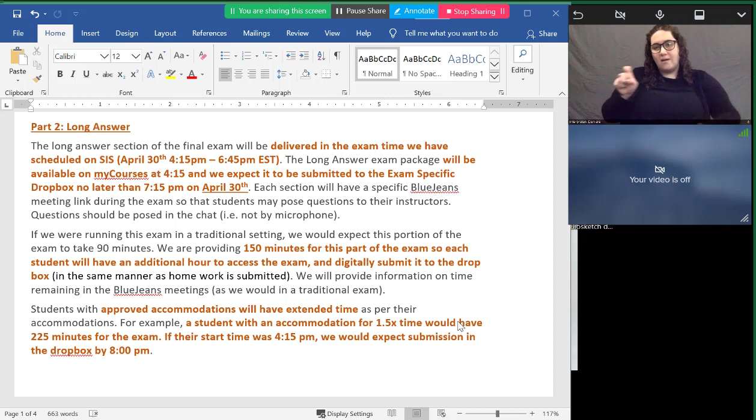So I think the last part of this, which we end up talking about a lot in things like faculty meetings, I think that there's a subset of people who are very worried about the academic integrity of these online exams. I was going to say we're going to treat you like adults, but I think we're going to treat you like engineers, in that we're going to expect that you approach this task with integrity.

So I think everyone knows what cheating looks like, and I guess I have faith in you that you'll approach this task honestly. Does anybody have any questions about the exams before we move on to the lecture material for today?

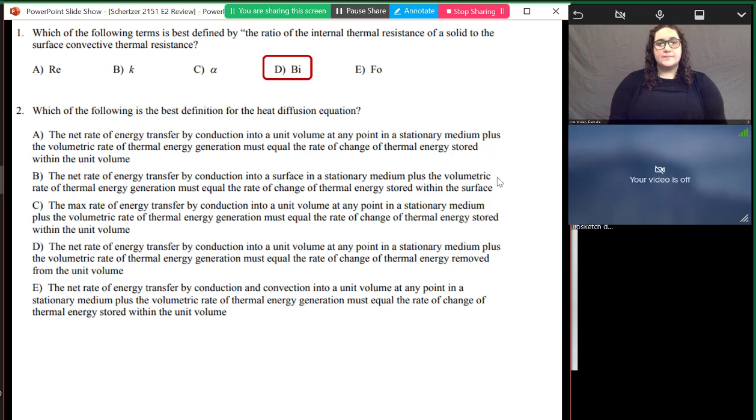Question 2: which of the following statements is the best definition for the heat diffusion equation? I won't read all of these, but I've underlined the key parts. First I wrote the heat diffusion equation down—this is on your exam equation sheet, so you'll be able to find it there. If you haven't looked at that sheet yet, I really encourage you to do your studying for the exam using that sheet. As I said, I did our exam yesterday, and because I haven't used that sheet all that often, I found myself spending time hunting for equations on there. If I was more familiar with that sheet, my experience would have gone even a little bit faster.

So here I'm trying to physically understand what this equation means. I'm not going to read all these to you, but I'll underline what I think are the important differences in these answers. Part B talks about thermal energy storage in the surface. One of the things we know about heat transfer is if we have a control surface, we can't store any energy in there because there's no mass. So we know that energy storage term isn't talking about what's going on in a surface—it's got to be talking about what's going on in a volume, so that there's mass inside of it.

Part C looks mostly good, but it talks about the maximum rate of energy transfer by conduction. This equation doesn't tell us anything about minimums or maximums. We're not taking a derivative here to do some kind of optimization analysis. So this part is incorrect in C. It's not the max rate of energy transfer by conduction.

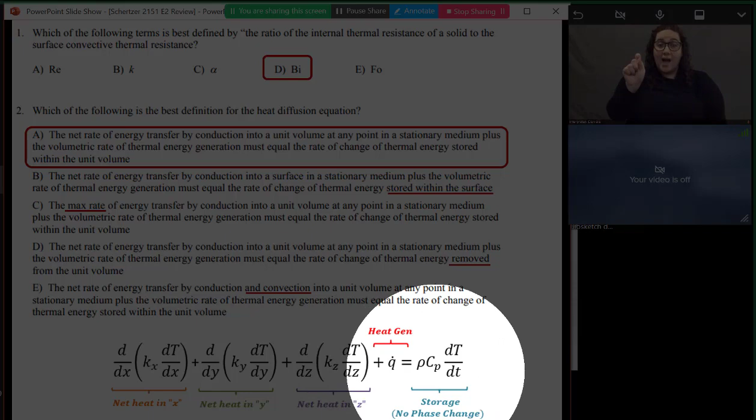So it's not E. By process of elimination, we're left with A: the net rate of energy transfer by conduction into a volume at any point in a stationary medium, plus the volumetric rate of thermal energy generation, must be equal to the rate of change of thermal energy stored within the unit volume. So these first three terms are talking about conduction in any of our three principal directions. Q triple prime, or Q dot, is energy generation per unit volume. And this term here is talking about energy stored within our volume.

Question 3 asks us which of the following is not an assumption made when using the semi-infinite model. So the initial temperature is uniform. We need to assume that the temperature in our material, or our steak for example if we're searing it, starts at some uniform temperature, and that the properties are constant. We can't really do any of these analyses if the properties are variable.

The Fourier number is greater than 0.2. Remember that the Fourier number is a dimensionless time. In this semi-infinite model, like when we're searing our steak, we only want it to happen really quick, so it happens at low times. 0.2 is the cutoff for the Fourier number, but when we want a semi-infinite analysis, we want the Fourier number to be lower than 0.2. Hopefully we remember this from our case study. So C does not look that good.

And D says heat has not propagated deeply into the material. That's true, so we can't apply a symmetry condition at the center of our material, or some sort of insulated boundary condition, because the penetration depth hasn't reached that symmetry line yet. So it's not really the right boundary condition to apply. The answer, which is not an assumption that we make, is that the Fourier number is greater than 0.2. Because for this type of analysis, we need the Fourier number to be lower than 0.2.

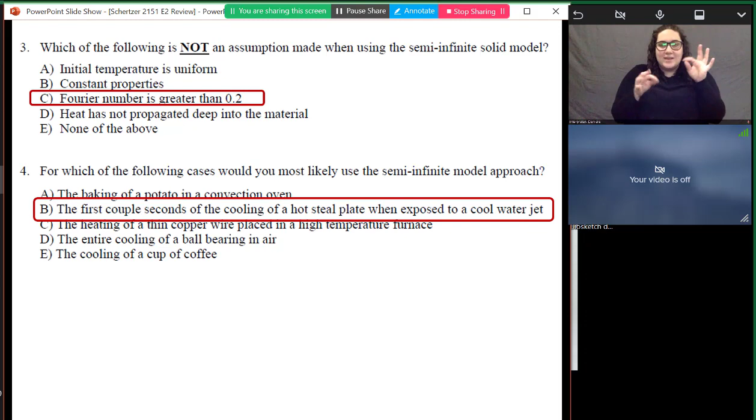So now we're asked to consider a pipe where the length is much larger than the radius. When you see this idea that the material we're interested in is much larger in one direction than another, that's telling us it's 1D conduction in the small dimension. So here, the length is much bigger than r squared, right? Basically, we're not worried about the edge effects. That's shown here on the right.

We're given an initial temperature, and it's suddenly exposed to a cold fluid on the outside and a hot fluid on the inside. Assuming constant and isothermal properties, what is the simplified version of the heat diffusion equation?

So here, from the notes, although in the exam, you'll look on your exam sheet and you'll look for the heat diffusion equation for cylindrical coordinates, right?

Now, when L is much bigger than r, actually, I think the first thing that I do - so here you might not see it - we're saying that the properties are isothermal and uniform, or constant, right? So they're not changing. So I can take the K's out of all of these terms. I have the same K in all my directions, and it's not changing with temperature, so I can pull it out of my differential terms and divide the whole equation by K. So that's what I did with this first simplification.

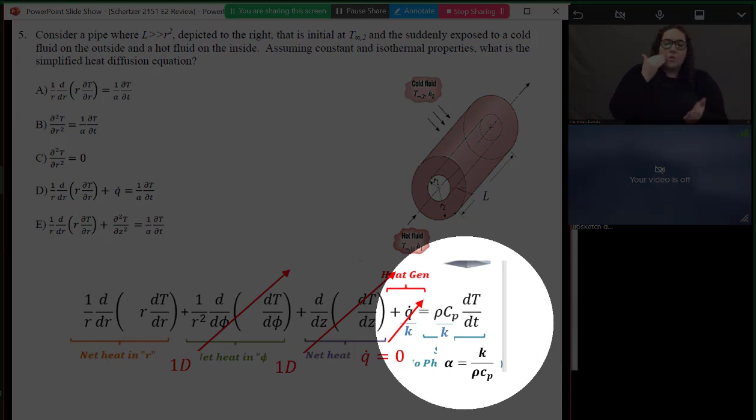The second thing is that we have 1D conduction, so we're only worried about conduction in the radial direction. There's no heat generation - it doesn't talk about generating heat anywhere in my problem, so I've eliminated that. And then I recognize the definition of alpha is K over rho Cp, so this constant in front of my transient term is 1 over alpha.

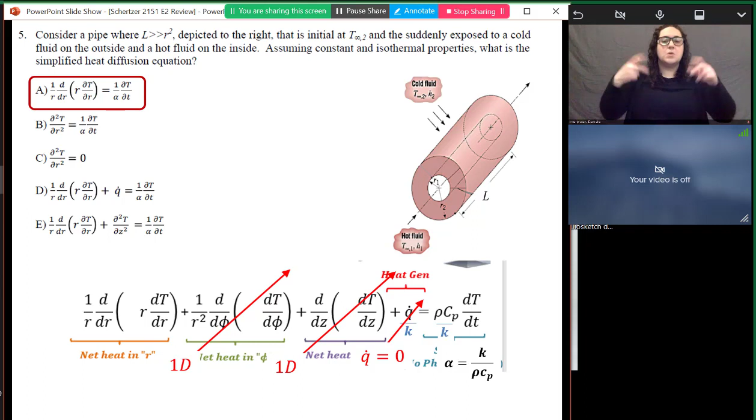So when I do all this simplification, I realize that A is the same as this simplified equation that I have here.

We're still talking about the same case. It says, which of the following is the best pair of boundary conditions? When you see this kind of equation, I always really force myself - this is one of those spidey sense kind of things - to slow down when it's asking me about these boundary conditions, because it's really, really easy to mess up the signs here.

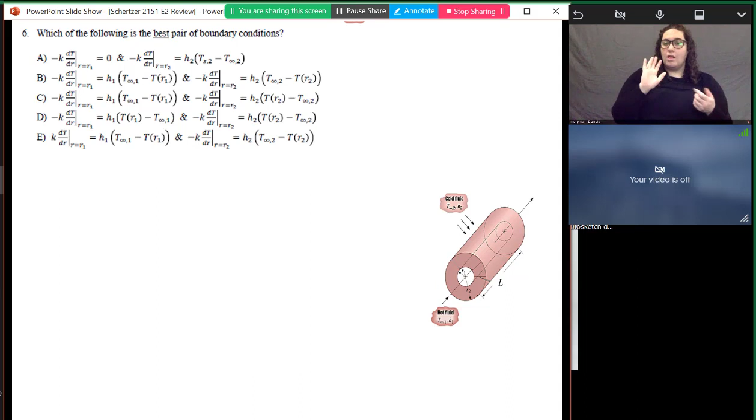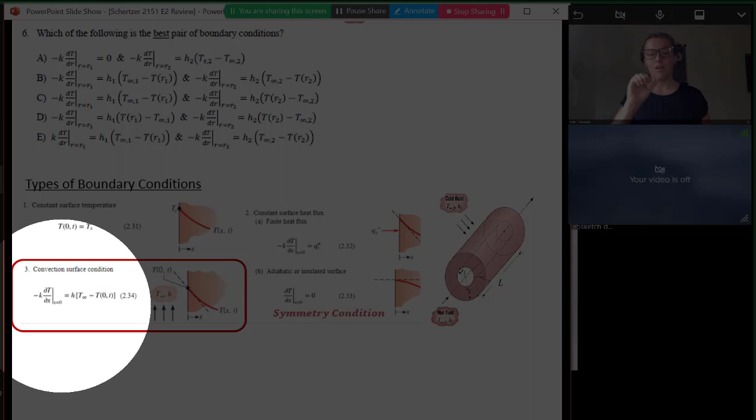So I know signs are going to be important. First I think about, okay, what do my different boundary conditions look like? In this case, I have a hot fluid running through the center of my pipe and a cold fluid coming cross flow over the side of my pipe. So I have convection on the inside and the outside boundaries. My convection conditions look like this, where on the left-hand side, I'm equating the conduction - this is actually for a wall and not for a cylinder, but it looks similar.

So here, I have conduction on the left-hand side being equal to convection on the right-hand side. So I know right away that it can't be A, because A has at R1, it says that there is no heat transfer there, and that's just not the case. We know that heat is coming in at that inside boundary, so A is incorrect.

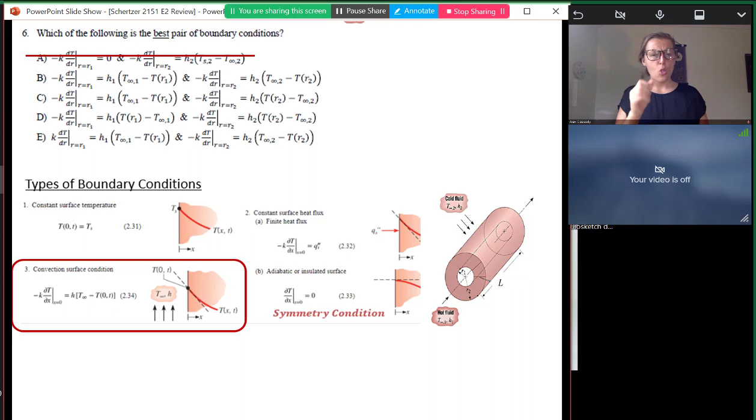On its face, as I'm looking at them, all of the rest of these boundary conditions look okay - they're all convection boundary conditions. So I've got to go through them and find out what's going on here.

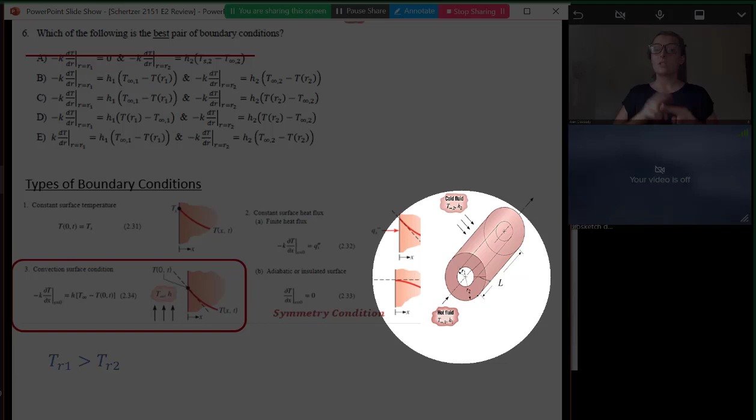So when I do this, I try to remember, okay, where's the hot temperature and where's the cold temperature? In this case, the hot temperature is at the inside and the cold temperature is on the outside. So as R increases here - as I move from the center of my pipe out, or the inside wall of my pipe out to the outside wall - I'm cooling down.

So that means that as R is increasing, T is decreasing, so my derivative, dt by dr, must be negative - it's less than 0. This is true at the inside wall, and it's true at the outside wall because there's no other source of heat in this problem. So both of these derivatives, dt by dr, at the inside wall and the outside wall, both need to be negative.

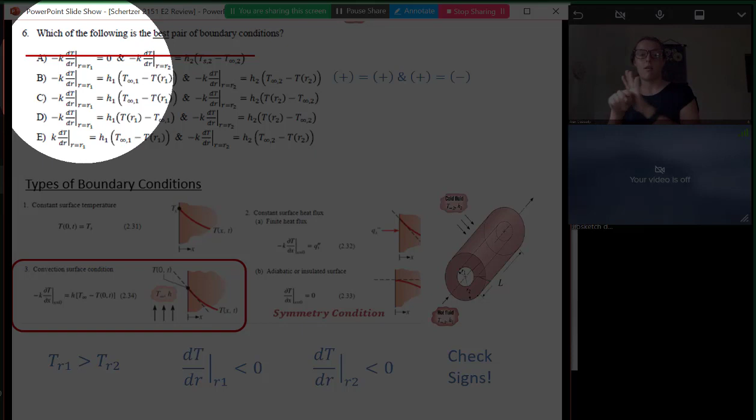So now I'm going to go through options B to E and look at the signs and make sure that the sign on the left-hand side of all these boundary conditions equals the sign on the right-hand side. So in the first one, I know that dt by dr is negative, and it's multiplied by a negative, so I have a positive sign on the left-hand side of my equation. And now T infinity 1 minus T at R1 - T infinity 1 is bigger, it's hotter in the hot fluid than at the surface because there's some resistance there.

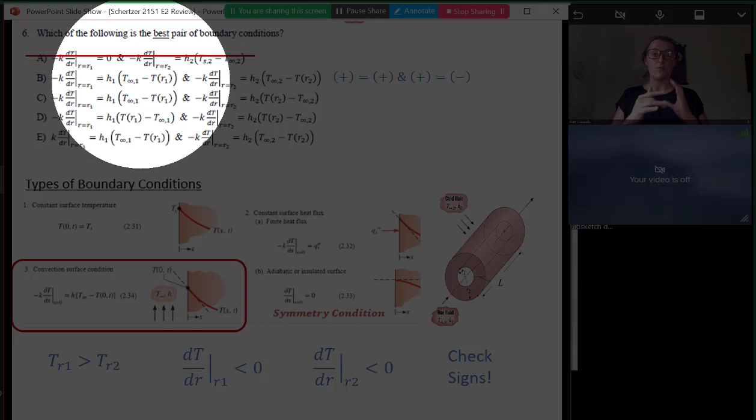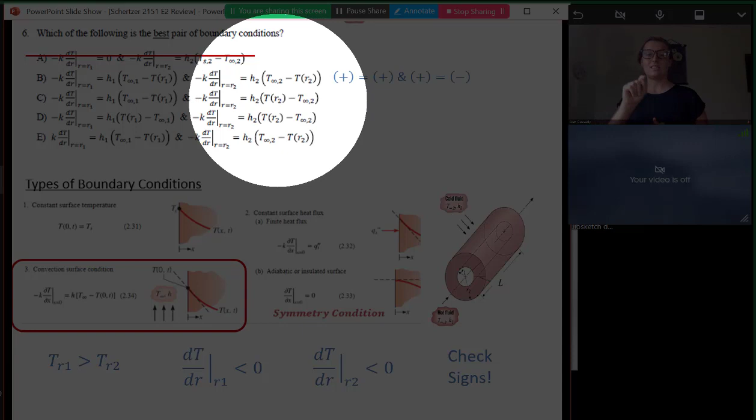So this is positive too, right? This delta T is positive. So this B, the first part of B looks good, right? It's positive and positive. But the second part of B, it's positive still on the left-hand side, but it's saying T infinity 2 minus TR2. I know as my radius is increasing, my temperature is decreasing, but the outside surface of the pipe is still hotter than T infinity 2 - that's the cold fluid being used to cool this pipe down. So T infinity 2 is lower than TR2, so that's a negative sign on the right-hand side of my second boundary condition. So it can't be this one.

I do the same thing. The first boundary condition is the same, so it's positive equals positive. And the second boundary condition flips my delta T around, so it's now positive equals a positive. So if you were going quickly, you might just stop at C. But sometimes I don't trust myself, so I'm going to look through the rest of them as well.

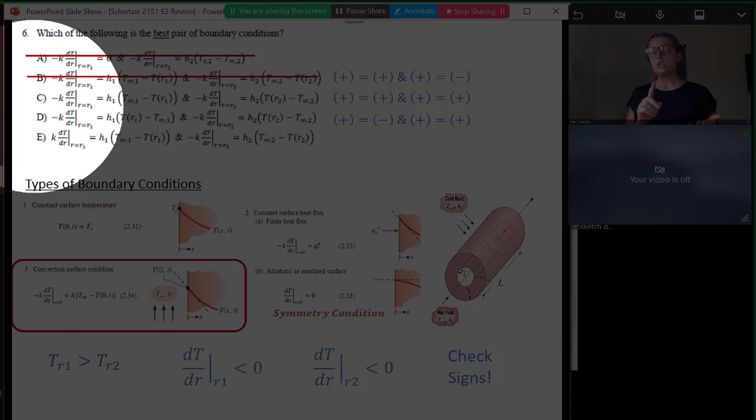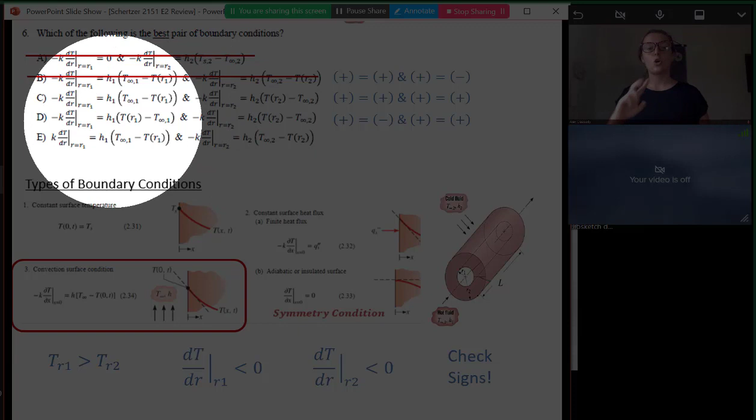So here, again, I have a negative times this derivative, so it's positive - negative times negative. But now this, TR1 minus T infinity 1, this temperature is colder than that one, so this H times delta T here is negative. So a positive can't equal a negative. So this one, D, I can eliminate.

And E, right? So here, there's not this negative K. So this is negative on the left-hand side of my first boundary condition, but positive on the right-hand side. So I know that this one is also incorrect.

So I've gone through all my signs here. I slowed down and took the time and picked the one where all the signs were correct. I think this is what you need to do for these kinds of equations, because if I just look at them quickly, it's really easy to think B through E are all almost the same. So we've got to check the signs. Anytime we're applying a boundary condition, make sure your signs are correct. It's not just a matter of saying, oh, it's H times delta T, but what does that delta T have to be to make the sign equal to negative K times the first derivative of temperature with position?

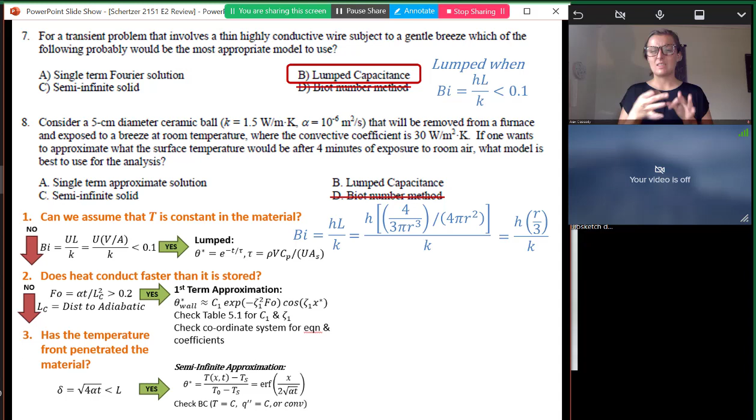I know that L is volume divided by area, as shown here. I simplified it already. This should be 4/3 pi r cubed, with pi r cubed in the numerator. The answer is right though, so then we get h r over 3 divided by k.

So I can put that in, work it out, and see the Biot number is 0.17. It's only lumped if the Biot number is less than 0.1, so this is not a lumped capacitance analysis.

So now I have to go to the next piece on my flowchart: does heat conduct faster than it's stored? I have to check the Fourier number, which is alpha T divided by Lc squared.

For this sphere, or ball, Lc is always the length from the surface to the place where I've applied either a symmetry condition or an insulated condition. For a sphere or cylinder, that's the center. For a symmetric wall, it would be the half width. So here, Lc is R.

So I have enough information to calculate the Fourier number, and I see it's pretty big, much bigger than 0.2, which is my cutoff. So here it is a first term, or single term, approximate solution.

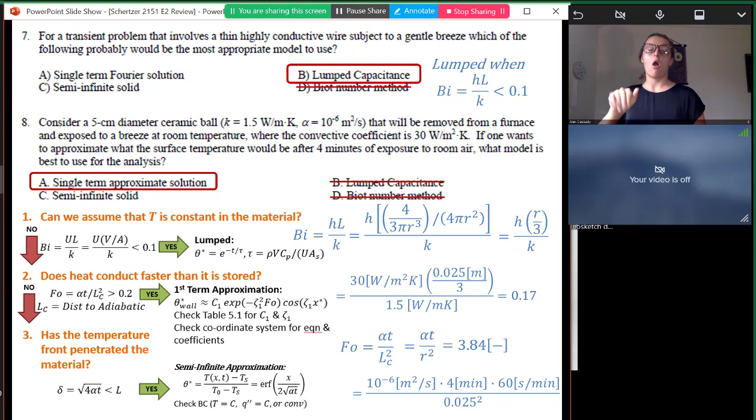So I got an answer for question 8.

Question 9 says: consider a 20 centimeter diameter titanium sphere, initially at 600 degrees Kelvin presumably everywhere. We're given some properties. It's being cooled on all sides by water at a particular temperature with some properties, where the convective coefficient is given. How long does it take for the center of the sphere to cool down to 350 degrees Kelvin when the Fourier number is 0.53?

When I was setting up these notes, I thought this would be a lot of work because I'd have to go through the whole first term approximate solution. It has to be first term approximation if it's not lumped anyway, because the center has changed temperature quite a lot, from 600 degrees to 350. So it knows it's being cooled at the center, meaning it's first term approximation, or at least not semi-infinite.

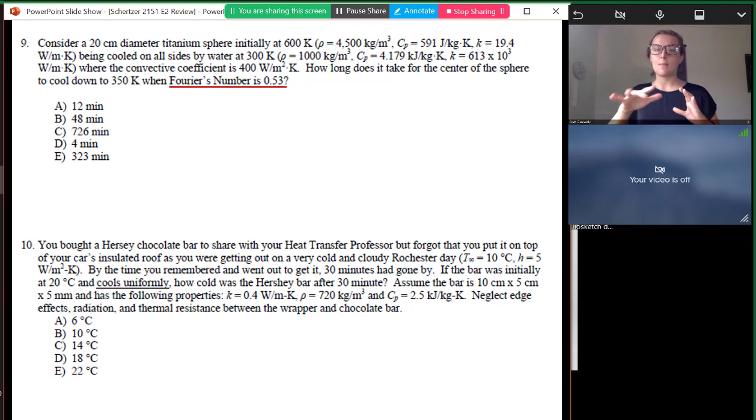But then I realized the Fourier number is 0.53, and it's only asking me for the time. So if I know the Fourier number and the properties, I can just calculate the time without doing any other analysis, just using the definition of the Fourier number. The problem is a little tricky though, giving a lot of red herring information to test whether you know you need to use the properties inside the material.

So alpha is equal to K over rho Cp. I calculated this using the properties of my titanium sphere and got a value, so now I know alpha. R is given, and so is the Fourier number, so I can put this in and get 727 seconds, which is not on the list.

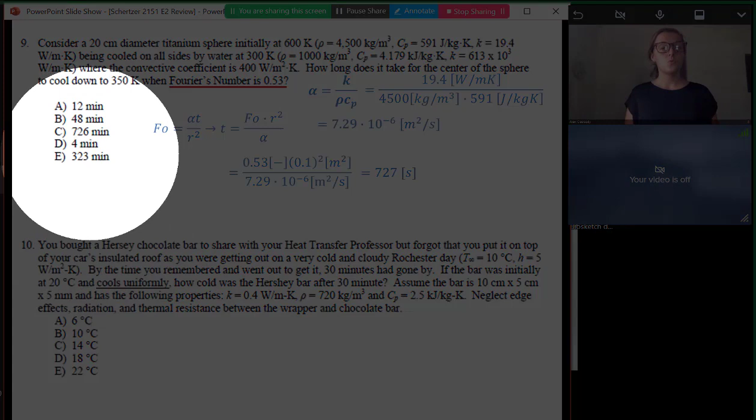If I wasn't worried about my units, and was being quick, I might pick 726 minutes, which is very different from 727 seconds. So I have to realize my units are in seconds, while all the answer choices are in minutes. Dividing by 60, I see the answer should be A, 12 minutes.

So we move on to the last multiple choice question. You bought a Hershey's chocolate bar to share with your heat transfer professor, which was very kind of you, but you forgot that you put it on top of your car's insulated roof as you were getting out on a very cold and cloudy Rochester day. By the time you remembered and went out to get it, 30 minutes had gone by. If the bar was initially at 20 degrees Celsius and cools uniformly, how cold was the Hershey bar after 30 minutes? Assume the bar has given dimensions and the following properties, and we're going to neglect edge effects, radiation, and thermal resistance between the wrapper and the chocolate bar.

So here, I'm going to say that it's lumped. I could calculate the Biot number, but it tells me that it cools uniformly, so that means I can do a lumped analysis. The nice thing about these analyses, first term approximation is the same, is that we don't have to go through all the work of deriving an equation because we're kind of standing on the shoulders of giants. People have done this already, so we know what the answer looks like.

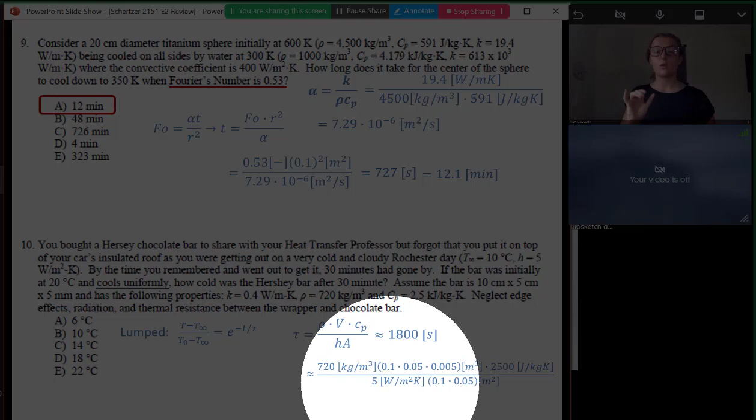But I don't know tau yet. I look on my equation sheet and find the definition for tau, which is my time constant. I know these values, so I plug them in, and I see my time constant - again, I really got to be careful of my units here. It's tricky because if I just look at the units in this equation, it doesn't look like I have seconds here, except that watts is joules over seconds. So the joules in here is going to cancel out with the joules over here, and in the denominator, I'm going to be left with 1 over seconds. So then when I multiply that back up, I get 1800 seconds. So I got to always watch my units.

In this case, it's 1800 seconds that have gone by, so my exponent in my exponential term is -1. Now, one of the things I always do if I mess up these kind of problems is I forget that this exponent is supposed to be negative. So really make sure you check those signs, because I end up a lot of times calculating these things individually and I forget to put the sign back in. So it's one of the things with exams - usually if I messed up on an exam, at least often, it was little clerical things like that.

And then I'd get my test back. I mean, you never got exams back, but when I got my test back, I'd be like, oh, what a stupid mistake to make. Only human, I guess, right?

So here we know T infinity, we know theta naught, that's my initial temperature difference, and I know e to the -1. So I work this out and I get 13.7 degrees. So the best answer here is 14 degrees Celsius.

So that's it for the multiple choice questions. Does anybody have questions about these multiple choice problems we went through?

Okay, we will move on to the first long answer problem, again written by Dr. Schertzer. You can tell because it's a Star Wars question.

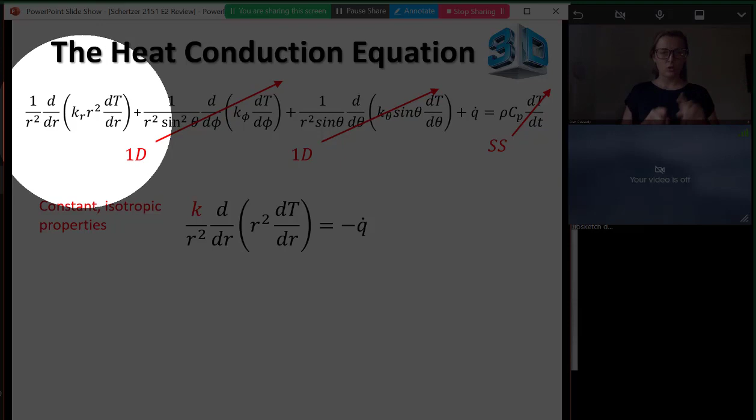We're going to say that this is at steady state, so the energy storage term drops out. We're also going to say that K is constant, so I took K out of the derivative term and moved it over here. I also dropped the subscript because there's only one K in this problem — it's not different in the radial and azimuthal directions. So K comes out, and then we get this equation.

So that's this equation here, but we want the temperature profile, so I know I'm going to have to do a little bit of calculus here. First I want to use the method of separation of variables, so I want to get all my R terms that I can over to the right-hand side of the equation. So I multiply both sides of the equation by R squared over K.

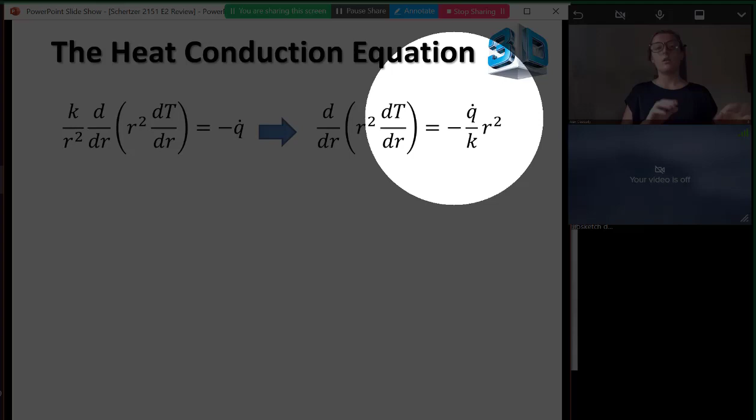This term drops out on the left, and then I get this term, which is basically a constant multiplied by R squared. So now this is a second order differential equation, so I've got to integrate twice. The first time I do this, I get rid of the d by dr out here because I've integrated.

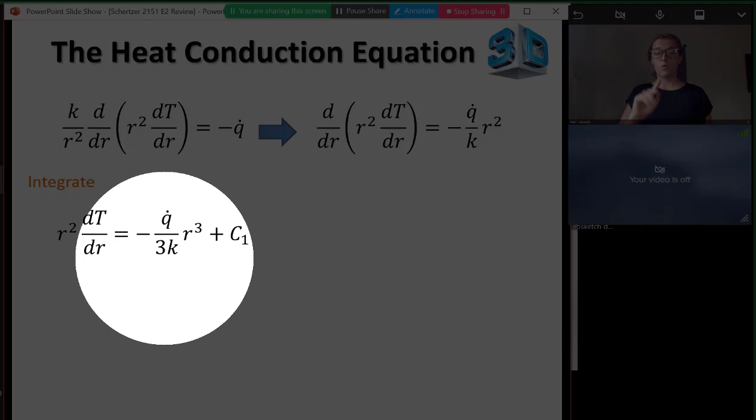And then I have to integrate that negative q dot over k term times r squared, so now this becomes r cubed. I had to divide by 3, and I had to add some constant of integration over here.

Now, again, I want to get rid of all the r terms that I can on the left and put them on the right, so I divide both sides of my equation by r squared. So I get dt by dr is equal to some term that's to the power of r to the 1, and then another term that's multiplied by r to the minus 2.

I'm going to integrate again. So now I add 1 to the exponent of r, and now I had to divide by, in this case, 2, because this was a 3 over there, so I divide it by 2 and I get a 6 on the bottom. I add 1 to my exponent here, which was r to the negative 2, so plus 1 is r to the negative 1, and then this becomes negative because I got to multiply by that negative 1. And then I have some other constant.

So we're on the road. So now we have an equation for temperature, but it's not specific to this problem yet because we haven't applied boundary conditions. My first boundary condition is that my sphere is symmetric, so that means dt by dr at the center of my sphere is 0.

My second boundary condition, there's two different options I can take, and I'm going to recommend to you which one to choose. We can say that there's some constant surface temperature on the outside — I don't know what that surface temperature is yet, but it is some constant temperature. The nice thing about doing this is that my first boundary condition applies to the first derivative of temperature, and my second boundary condition applies to the temperature as a function of r. So I like to have boundary conditions that apply to different equations here.

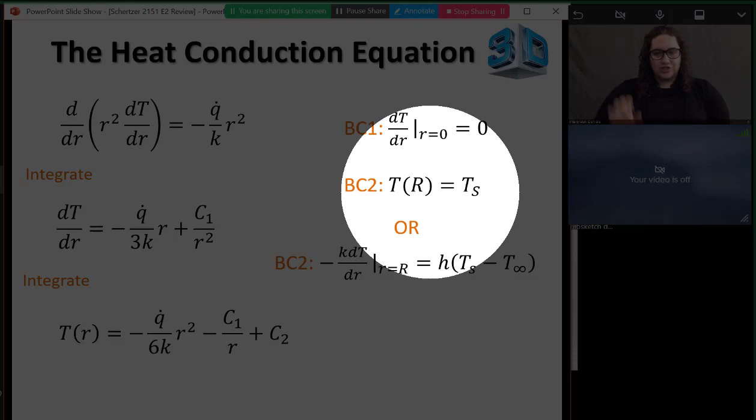But it's also true that I could apply a boundary condition on the edge, because it told me that the conduction on the outside is equal to the convection — the conduction going into the outside surface equals the convection going away from it. Here I just got to make sure my signs are correct. But I'll show you that in the solutions, they go through this second boundary term, and what happens is from this equation you'll find TS, and then you'll still have to apply basically my second boundary condition anyway. So I'm going to encourage you, when you have a choice like this, to apply that second boundary condition as just the temperature at the edge being whatever that temperature is, even though you don't know it yet.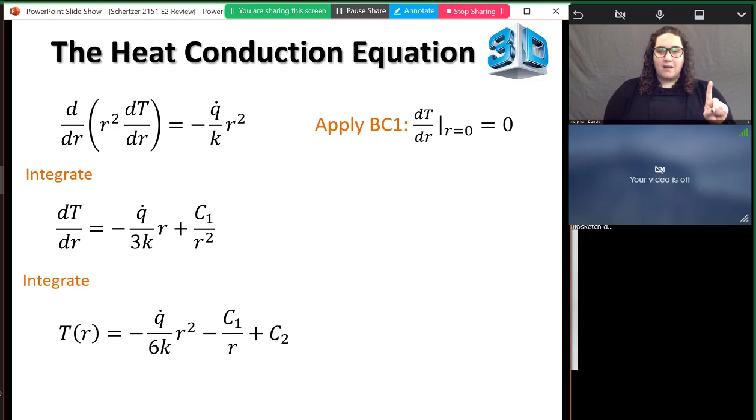So when we apply our first boundary condition, if R is equal to 0, then we need C1 to be equal to 0. Or if the derivative at the center is 0, then we need C1 to be 0, so that term goes away. Now our equations are a little bit more simplified.

The second boundary condition I'll say is that T at R equals big R, at the edge of our sphere, is equal to some constant surface temperature. If I do that, I get this equation by plugging big R in for little r, and that's just going to be equal to my surface temperature. I don't know what it is, but it only asks for a symbolic solution anyway.

So from this equation, I can isolate C2, and I get an expression for C2 that's a function of big R. Now I take this expression and plug it back in, and I get a temperature profile for the whole droid. If I put this in, I see I can factor out Q dot over 6K, times big R squared minus little r squared.

And then that's plus the temperature at the surface. So this kind of makes sense - this tells me the biggest temperature should be at the middle, because I'm generating heat and there's no more heat that can go to the middle, so it has to go out. So when little r is equal to 0, I'm going to get the biggest value here because this term is going to be positive.

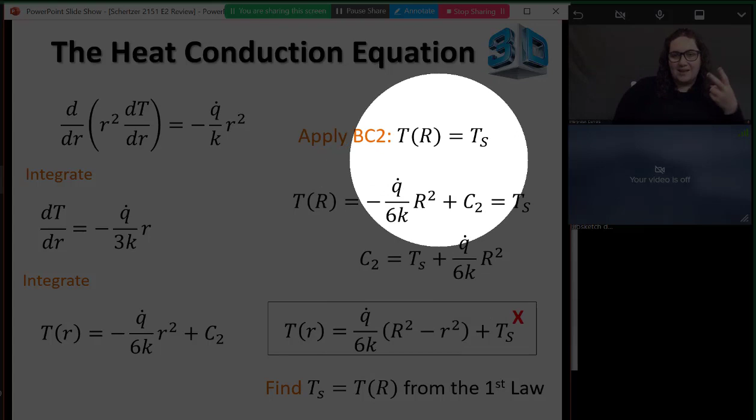If I did the other boundary condition, the order would be switched. If I applied the alternate version of the second boundary condition, the convection boundary condition we talked about, what would happen is I would find a value for TS first, and then use that value to find what my equation looked like. So the order is a little different.

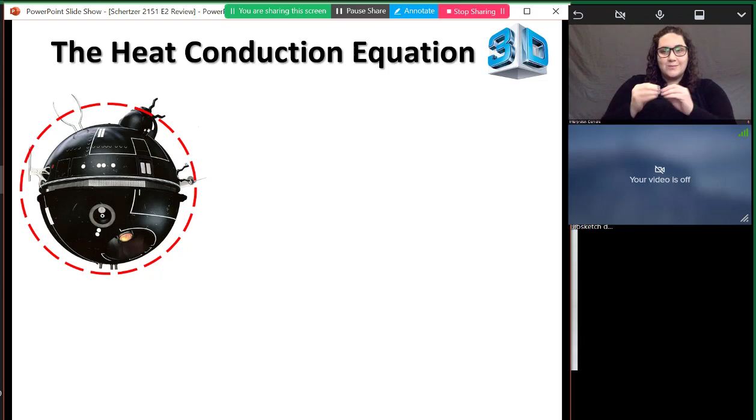But I can find TS without even using the heat diffusion equation, because I can just think about this as the same kind of problem we'd ask in Module 1. So I draw a nice picture of my droid, I apply a control volume so the droid is inside it, except maybe some of the pointy bits. And I can just use my first law - this fits with our rule: whenever you don't know what to do, try the first law.

So we know it's at steady state, so the energy storage term goes to 0. There's no energy entering my system, but there is energy leaving my system, and the droid is generating heat. It's got to generate a bunch of heat - it's floating, so it's got to be doing a lot of work in there.

So the amount of heat that it's generating is going to be Q dot, the volumetric heat generation, multiplied by the volume. And that's going to be equal to all the heat that convects away from the surface, which is HA times delta T.

So here I know that the volume is 4/3 pi r cubed, and the area is 4 pi r squared. So I sub that in, right? And instead of carrying this all through, I can simplify this equation.

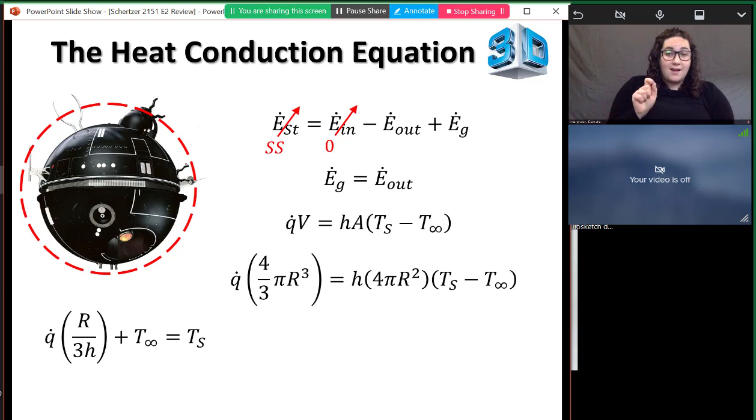So I can isolate for the temperature on the surface, which is going to be T infinity plus Q dot times R over 3H. I feel pretty good about this equation too, because I know that since this is generating heat, the surface temperature should be bigger than T infinity, and all of these terms are positive, so I should get a number that's bigger than T infinity. Which is how I know that's how it should be.

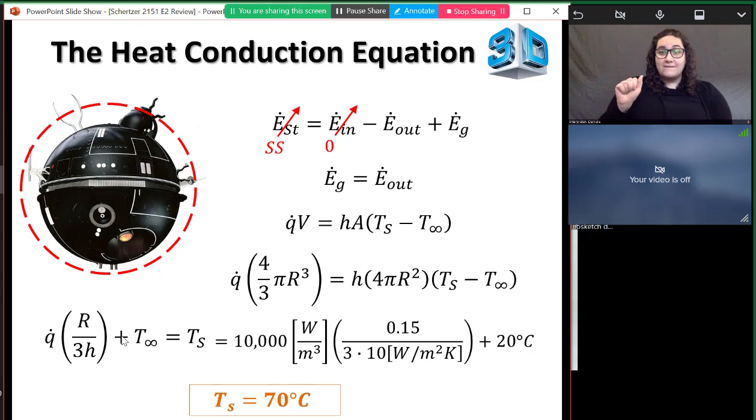So again, I'm not proving that I'm right here, but I can show that I'm not wrong. So I have some values here. I plug these in, and I find that the surface temperature is 70 degrees. That's pretty good because I know that Vader wants the whole thing under 75 degrees. So at least the surface is under 75 degrees.

So that's good, I haven't failed Vader's specifications yet. Now I got to go back to my equation, and I know that the maximum temperature is going to be at little r equal to 0. So I plug that in here, and my first term just becomes Q dot over 6K times big R squared. I work this out, put these numbers into my calculator, and I see that the maximum temperature at the center of the droid is 77.5 degrees. Vader asked for the whole thing under 75 degrees, so 77.5 is bigger than 75. Vader's going to be upset, so we didn't pass the specifications.

Does anybody have questions about how we approached this first long answer problem here?

I do have a question. So I was following along with the process, but I just have a question. Those boundary conditions, do we have to memorize them? Because, I mean, do you have to? So the boundary conditions are going to be different for every problem.

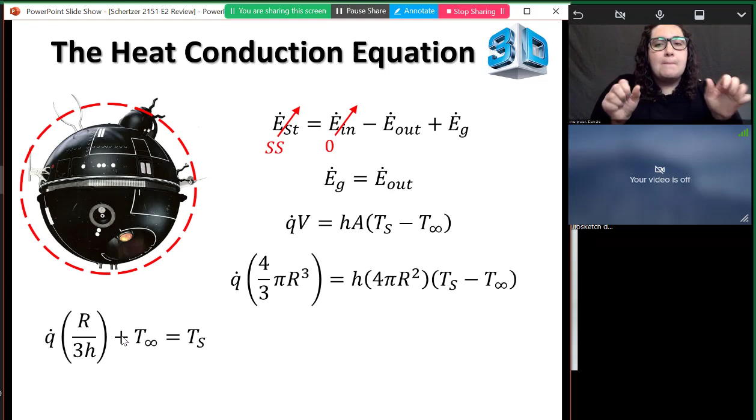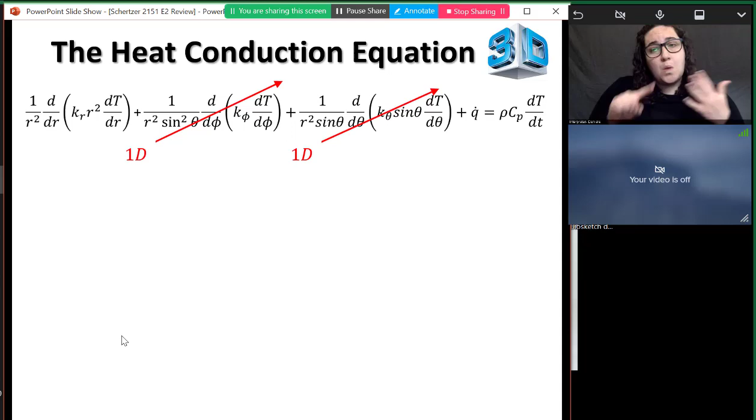I guess you do have to memorize what a convection boundary condition looks like, and what a conduction boundary condition looks like. So you should know what these look like. But the good news is they're all just first law energy balances on the surface of the system. Where did I put it?

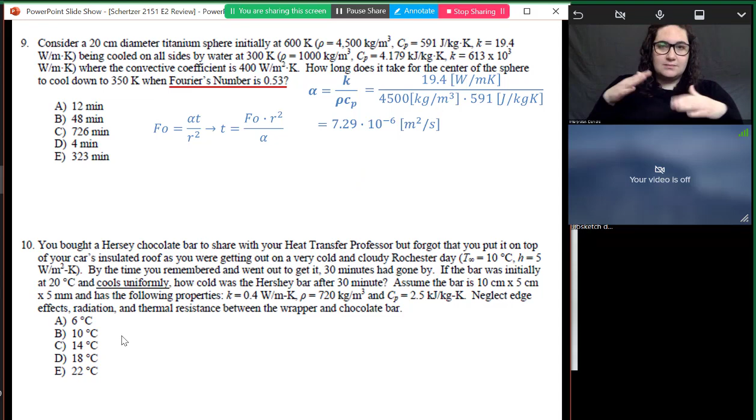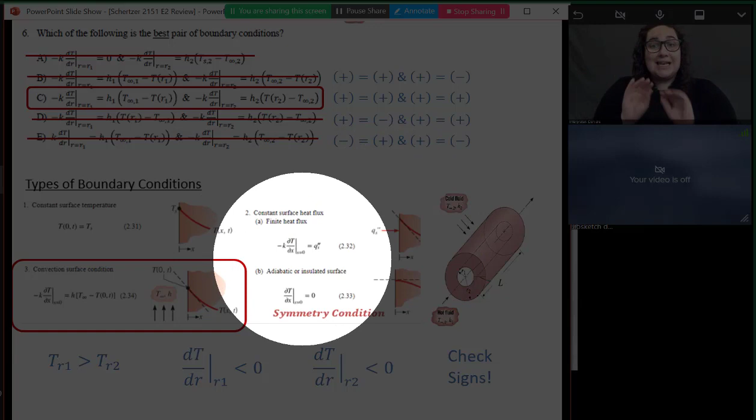So I guess you do have to memorize that, in the way that we need to know how to do Module 1 type questions. I suppose you do need to know that if it says a surface is adiabatic or insulated, then that means the derivative of temperature there is equal to 0. Or if there's a constant heat flux, that's a first law balance too, saying all the heat that goes into the surface is equal to the conduction that comes out the other side of the surface. So this is also an energy balance on a control surface that's kind of the skin of this surface.

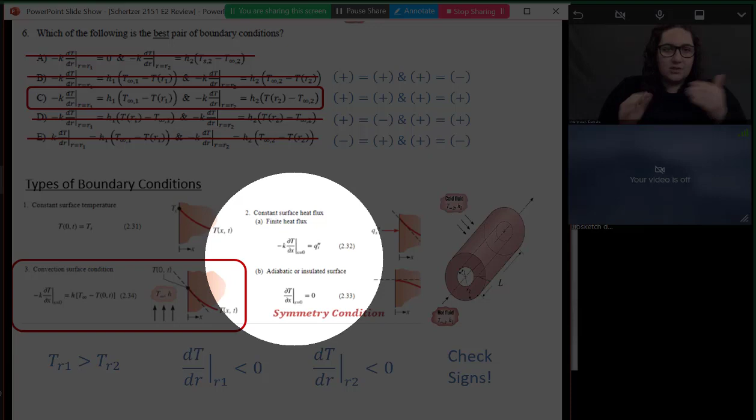So you do have to know it. How you choose to know it is up to you. I always hated memorizing things because I think I'm just not that good at it, so I always tried to understand where things came from. Hopefully by understanding that these come from a surface energy balance, you'd be able to just figure out what these were. But if that doesn't work, then I'd suggest memorizing these things.

I will see, I should have a copy of the exam sheet here. I don't know that it's... I'm just looking at it quickly here. Like I said, when I was going through this, I didn't always see what was on this sheet, so I would just derive something like that if I had it, since it's this Module 1 type question. So I don't see those boundary conditions listed here, so I think you do have to know how to get them or know what they are.

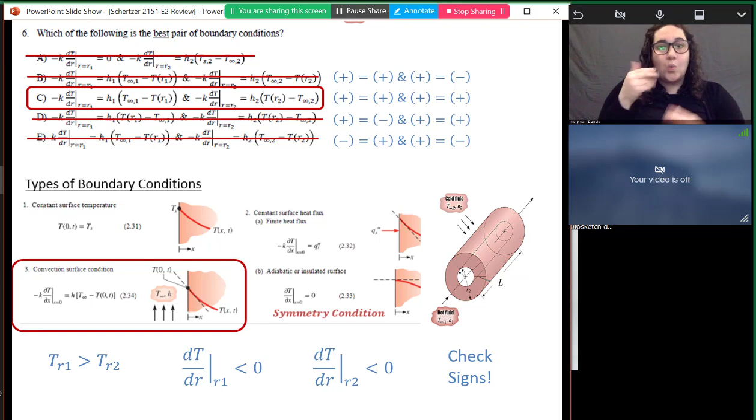Are there other questions about this problem? Nope, that's it, thank you. You're welcome.

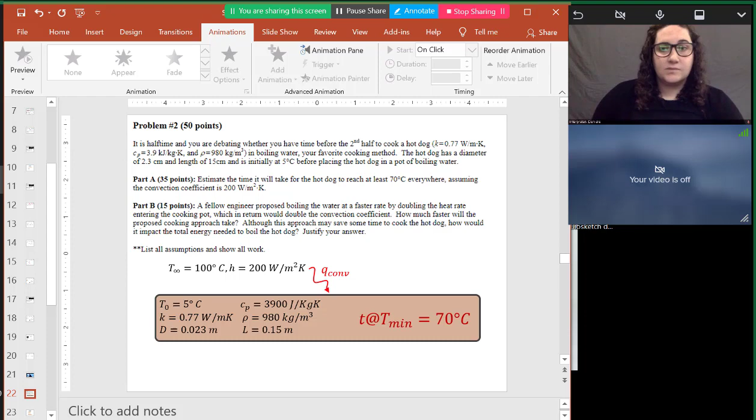So our next question is not about steak, right? In the pandemic here, all we get is hot dogs.

So it's halftime, probably near the Super Bowl, and you're debating whether you have time before the second half to cook a hot dog. You're given some properties, boiling in water, which for some reason is your favorite cooking method, maybe because it's got uniform convection and makes sense as a heat transfer problem. The hot dog has a given diameter and length, and because you're taking it out of the fridge, it has an initial temperature of about 5 degrees Celsius. Then you just drop it right in the boiling water. Estimate the time it will take for the hot dog to reach at least 70 degrees everywhere, assuming the convection coefficient is 200 watts per meter squared Kelvin.

In part B, a fellow engineer proposes boiling the water at a faster rate by doubling the heat rate entering the cooking pot, which in turn would double the convection coefficient. So what happens if we double H? How much faster will the cooking approach take?

You've got to think about this sort of like vehicle design. You can design a car with more power, but the trade-off is worse fuel efficiency. So here, maybe you're going to cook the hot dog faster, but how much more energy did you use? It might not make sense to do that. That's obviously subjective, but you should write down a sentence about it.

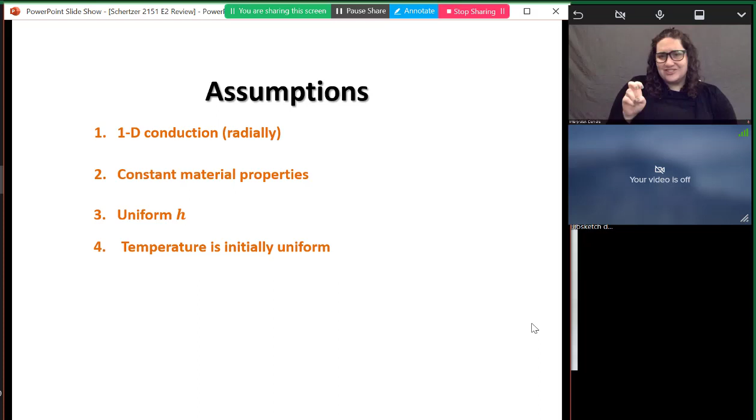So here we're going to assume 1D conduction. At least initially, it could be lumped, maybe there's no conduction, but I'm going to say there's 1D conduction for now, with constant material properties. It's pretty homogeneous—if you get your Zweigle's Red Hots or whatever, it's pretty blended up in there, pretty uniform. We're going to have a uniform heat transfer coefficient.

Temperature is initially uniform, radiation can be neglected, and the time is unknown. So our flow chart breaks down a little bit here because we don't know the time, so we can't calculate the Fourier number, since time is in the Fourier number. So we're going to assume, if it comes to that, that the Fourier number is big enough that the first term approximation is okay.

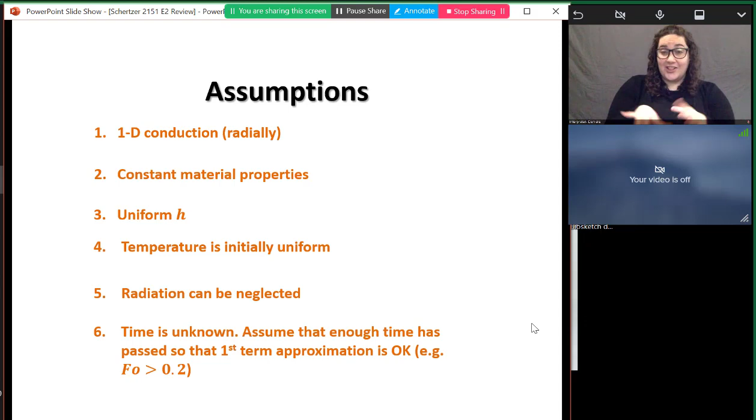I guess I kind of know that, because that's sort of the problem—if the hot dog is at least 70 degrees everywhere, that means it's at least 70 degrees at the center, which means it's not 5 degrees anymore. So the center of the hot dog knows that it's being heated because it's gone up by 65 degrees. So find the time, or estimate the time, that it'll take for that to happen.

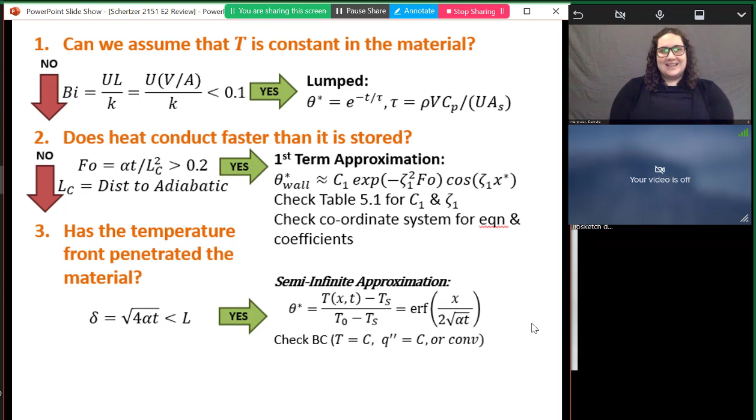So here I've got to go through my convection flow chart. Again, I'm always hoping for a lumped analysis because I think it's just a little bit easier, so I have some information and I'm going to calculate my Biot number. Now, we have to remember that the characteristic lengths are different for Biot numbers in a lumped analysis versus a first term approximation. So here my characteristic dimension is volume over area, so I put that in.

Again, I like to actually write out the equations because a bunch of stuff's going to cancel out. This is going to be h times r divided by 2, all divided by k. So I put this in, and I get a pretty big Biot number, definitely bigger than 0.1, so I know it's not lumped. If it's not lumped, and I know it can't be semi-infinite because the center of the hot dog knows that it's being cooked, if I'm doing this right, it's got to be the first term approximation.

But I've got to recalculate the Biot number here because my characteristic length changed. It used to be r over 2, which came from volume divided by area, but now it's LC, the distance from my adiabatic line—in this case that line goes down the center of the hot dog to the surface, so it's just the radius of the hot dog. Now my Biot number is twice as big as it would have been for a lumped analysis, and I see that the Biot number for the first term approximation is 3.

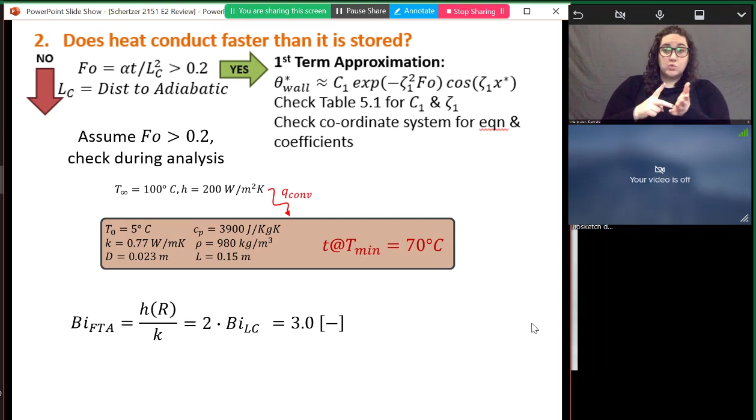So now I have a cylinder, and its minimum temperature, because I'm heating it from the outside, has to be at R equal to 0, right? So the temperature there is given by theta star naught, right?

So here I know, I looked it up on the equation sheet, that theta star naught is equal to C1 times E to the negative zeta 1 squared times the Fourier number, right? Which is easier to write down than it is to say.

But what I'm trying to really solve for here, because I want the time, right? So to get the time, I need the Fourier number. So I got to isolate the Fourier number, right? So I divided theta star by C1 first, dividing both sides of the equation by C1. And then I take the natural log of both sides, and then I divide both sides by negative zeta 1 squared, right? And this is what I get.

So first I'm just going to solve for the Fourier number. To do that, I need to know theta naught star. So this is going to be the temperature at the center of the hot dog at any given time minus T infinity, divided by T naught, my initial temperature, minus T infinity, right? So now the temperature at whatever time I'm trying to find is 70 degrees. So I can put that in, and I see that my theta naught star is equal to 0.316.

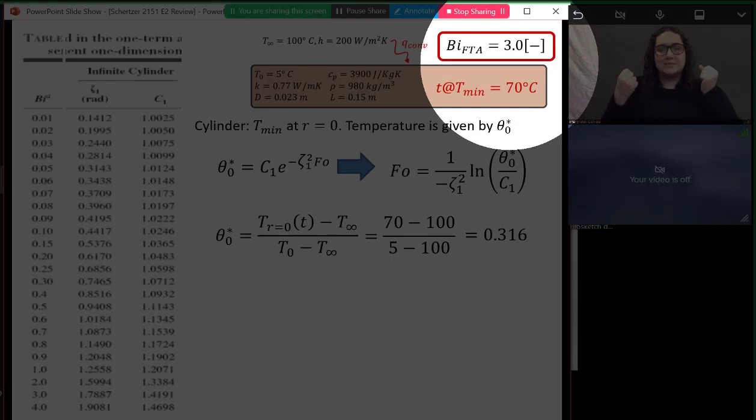Right? So now I need to find C1 and zeta 1. So I have to remember that I know the Biot number over here, and it's a different Biot number. So I would think, if I was grading this problem, so I wasn't teaching the class this semester, I think it would have been a very common mistake to keep this Biot number at 1.5 and not recalculate with the different characteristic length. So now I go to my table, which would have been provided.

It's not on the standard equation sheet, but if you need to do this, we will provide you with a table. We might provide you with the table even if you don't need to do this, right? So here you see the Biot number. You look for the cylinder part, right? So here I snipped it out, but this is for infinite cylinders. I can find zeta 1 and C1. I put those into my equation, and I see that my Fourier number is just under 0.5.

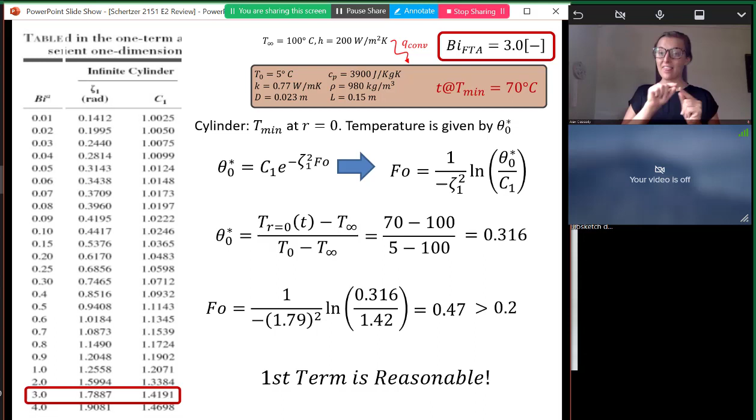So that's greater than 0.2, which is good. I think, like I said, just physically, I know that it has to be greater than 0.2. I know that this isn't a semi-infinite problem, but it's nice to see that my math backs that up, right? So that gives me more confidence in my math when I'm finding here that the first term approximation is a reasonable thing to do.

So now I know the Fourier number is 0.47, but I also know the definition of the Fourier number is alpha times t divided by r squared. So I can isolate this for t, and I know that alpha is k divided by rho Cp. I put all of that into my equation, and I get that the time is 308.5 seconds. So that's good.

I could convert this into minutes if I wanted to, right? But it just asked me for the time. It didn't specify the minutes, right?

So now I'm into part B, right? So here we're jacking up the heat rate, and we're saying how much faster will it cook and what's the energy difference, right? So first I'm going to answer how much faster is my hot dog going to cook if I do this.

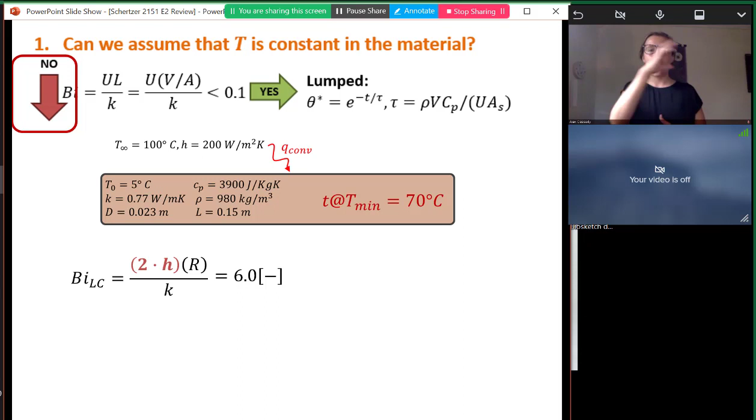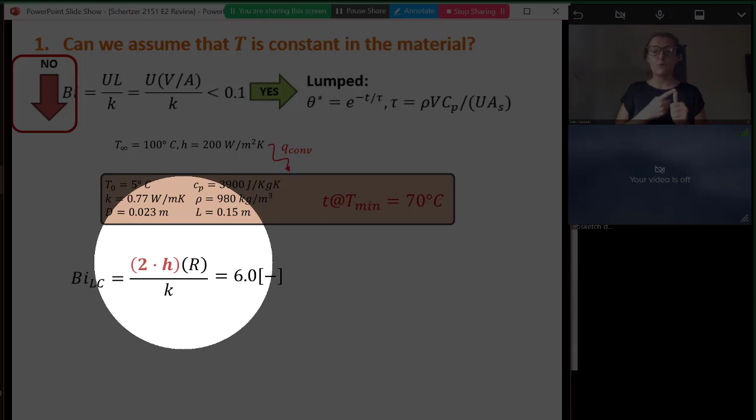So here I'm doubling my heat transfer coefficient, which means I'm doubling my Biot number, or Bi number, for lumped capacitance, right? So here this is 6, right? So this is not true anymore, right? So now my Biot number, actually, I guess here for the lumped capacitance it would be 3, right? Because here the lumped capacitance, the characteristic dimension isn't R, right? It's still going to be bigger than 0.1, but this is actually a mistake here, where this is the Biot number for the first term approximation that I'm calculating, because my characteristic dimension is R, right? Instead of R over 2.

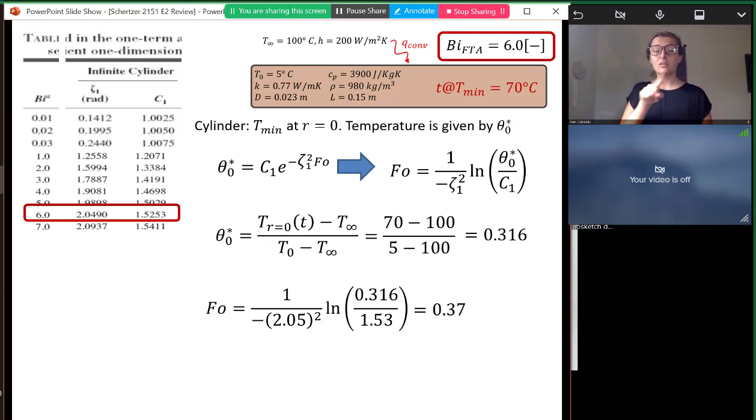So now we do the same analysis with the Biot number equal to 6. We go back and solve for time, but with different values of zeta 1 and C1. When we put those in, we get a different Fourier number, which is still bigger than 0.2.

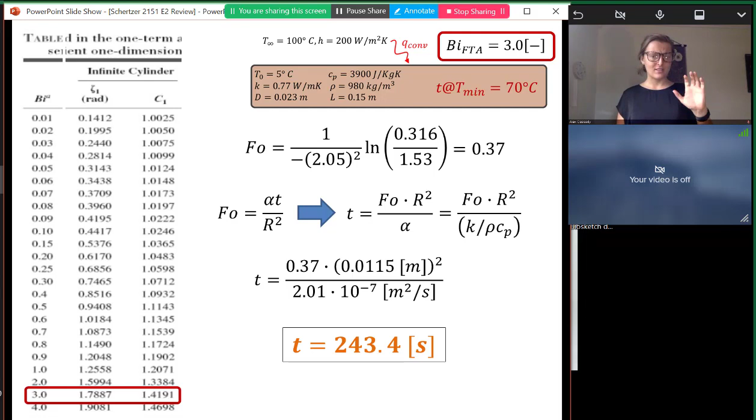When we use that different Fourier number to isolate for our time, we get 243 seconds. Before it was around 300 seconds, now it's around 240 seconds. So we saved a minute.

But there's no free lunch, right? Even if it's hot dogs. So we do have to see how much extra energy we consume.

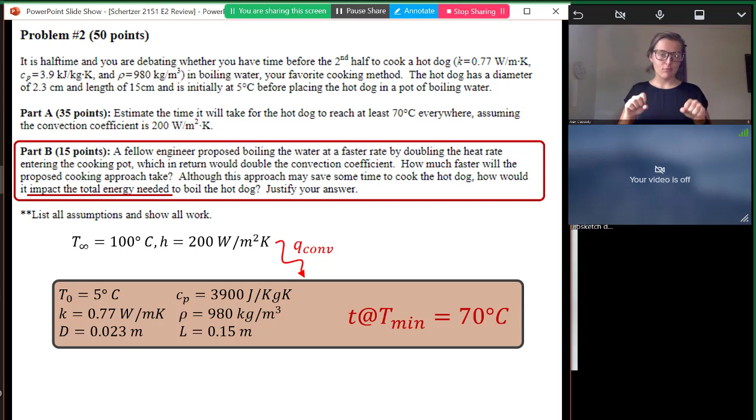What we want to do is find the total energy, which is our heat rate multiplied by the time we apply that heat rate for. In case A, I have one heat rate times the time I calculated first. In case B, I have a new heat rate, twice as big because I doubled the heat transfer coefficient, multiplied by a different time.

I could calculate the heat rate here by saying H times A times delta T. I think I'm given enough information to do that, but I don't want to, because I'd have to do the first term approximation and find the surface temperature. I don't want to do that, but I know that Q is going to be the same in both cases, or at least close to the same, so I'm going to cancel those out.

Now I have times for part A and part B, and I get 0.63. So the energy used in part A was just about two-thirds of the energy used in part B. If I take the reciprocal, the energy used in part B is about 60% bigger than the energy used in part A.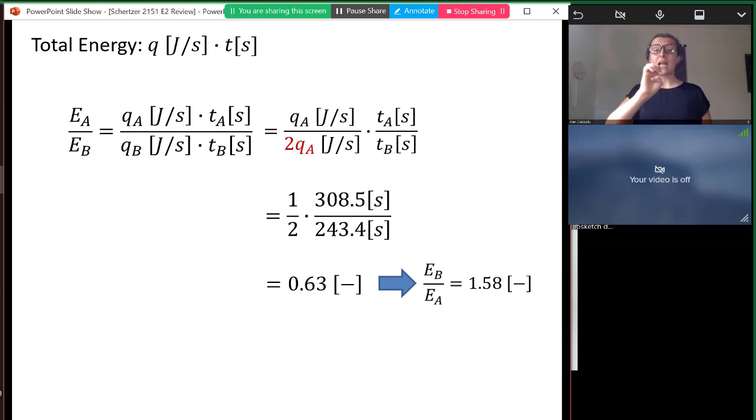So option B is good. It reduces the time by a minute, but the downside is it uses almost 60% more energy. So it's a trade-off, like many things in engineering. You have to ask how much that extra time is worth to you.

So, you know... sorry, no, you can't watch Baby Beluga.

What happens here is you just have to put a price on how much that minute is worth to you. That price is in dollars and cents because you're using more energy, but it's also in terms of environmental impact because that energy is coming from somewhere.

So that's the end of our second problem. Does anybody have questions about this problem?

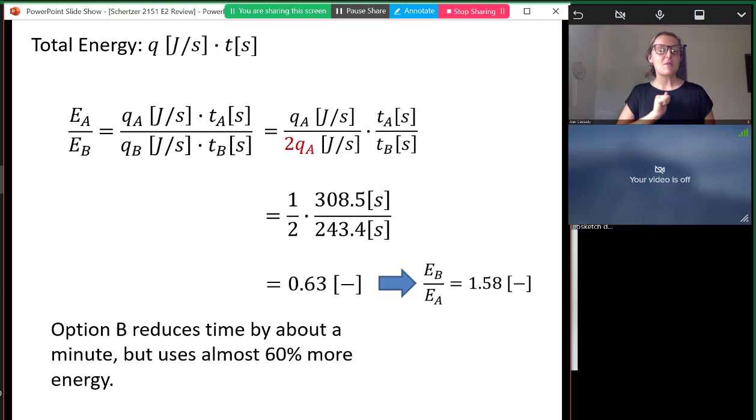Daddy, can you watch? Can you watch Daddy Butterfly?

So, anybody have questions about how we did this problem, or about the course in general?

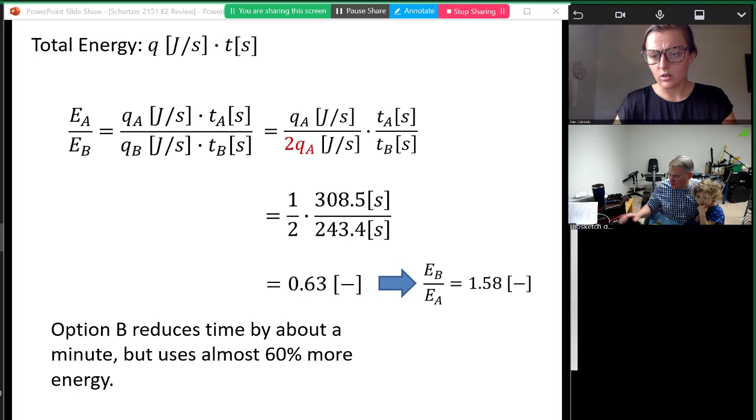Comparing lumped capacitance, there are two different cases, but the Biot number always looks kind of the same. The general structure of that equation is always the same: it's some effective heat transfer coefficient multiplied by some characteristic length, divided by K.

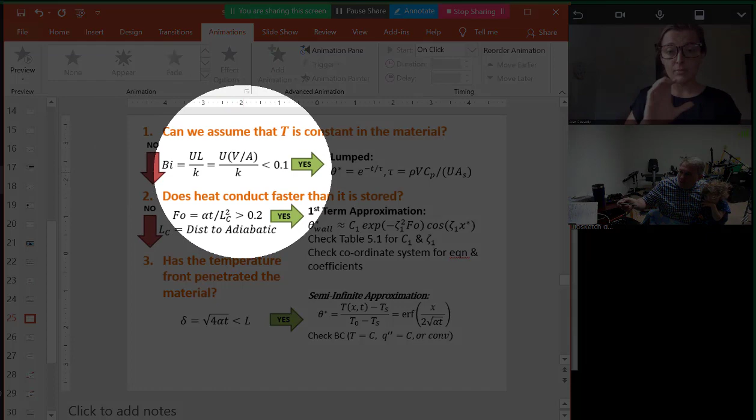Now the difference, and this is a very common error people make, is that the characteristic length is different for lumped capacitance versus the first term approximation. In lumped capacitance, that characteristic length is the volume of your material divided by the surface area that's exposed to the heat transfer.

In the first term approximation, the characteristic length is the distance from wherever your adiabatic or symmetry line is to the surface where the heat is being transferred. So we have to make sure we're using the right characteristic length.

Just like when you do internal convection versus external convection, the way you calculate the Reynolds number is different, because the characteristic length for a plate is the length along that plate, but for internal convection it's the diameter or hydraulic diameter. So whenever you're calculating a dimensionless parameter, you have to know what the right characteristic length is.

Okay, gotcha, I understand now. Thanks. You're welcome.

Any other questions about either the exam or information about our exam?